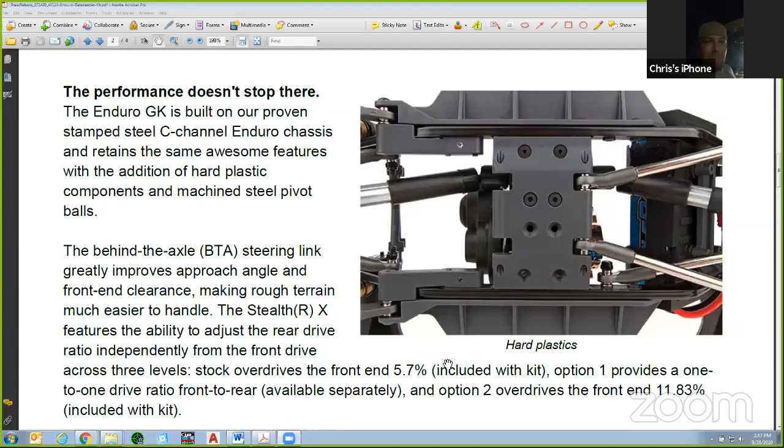This is very interesting because this platform can really evolve, and even their IFS series option that they have to upgrade, you could actually install this on here and make it work also. Having this small, to me it's a small rock crawler because it's on the smaller form factor, but it's theoretically going to be a little bit longer wheelbase than the Trail Walker or the other truck. It can really be anything wheelbase-wise, because you can make it whatever you want. So it's got a lot of potential on this, that's for sure.

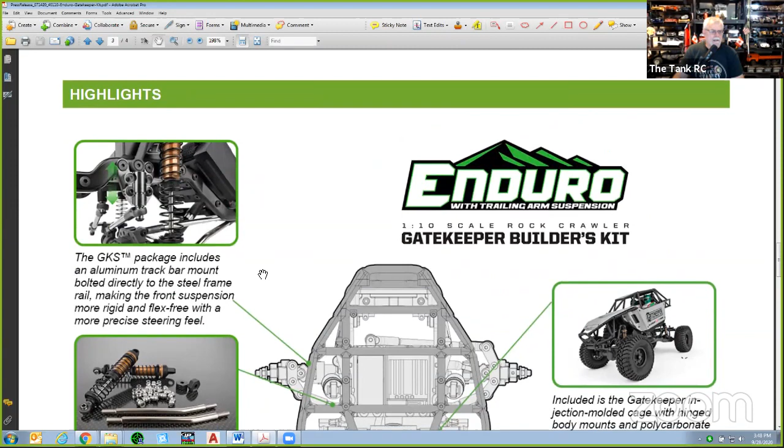They have this thing, and maybe we can talk to Chris about this, but this front piece here is for the GKS package, an aluminum track bar mount, for the front suspension, for the steering link. So that's very interesting, the way they've got it set up.

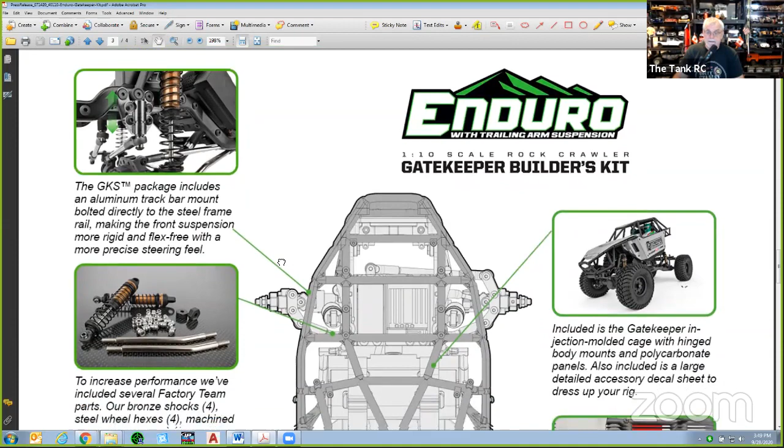It's kind of interesting how they've done it. The way the body opens up is really nice, it swings up all the way. If you watch HemiStorm's video, you'll actually see what he's doing. It's really neat, that shock position.

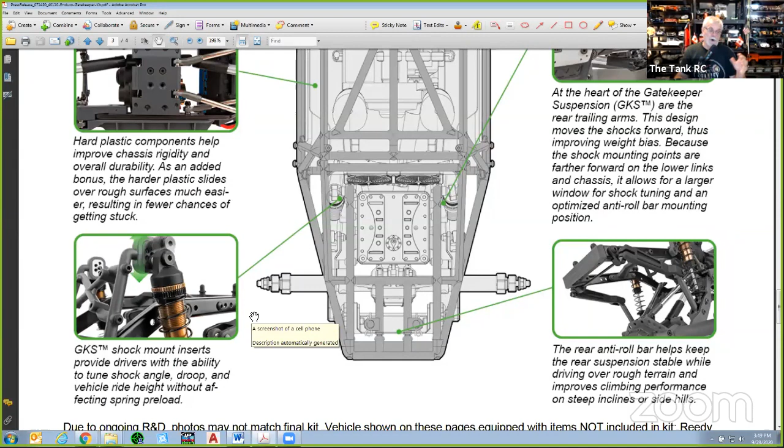They've actually announced some different parts they're having for hop ups, and these are the parts you're actually getting for this - the shock position that goes at the back. That's why they were showing new hop ups available, which are available for their other trucks, but now they're going to be releasing it for this truck here. So I actually got one on order, hopefully it'll get here soon.

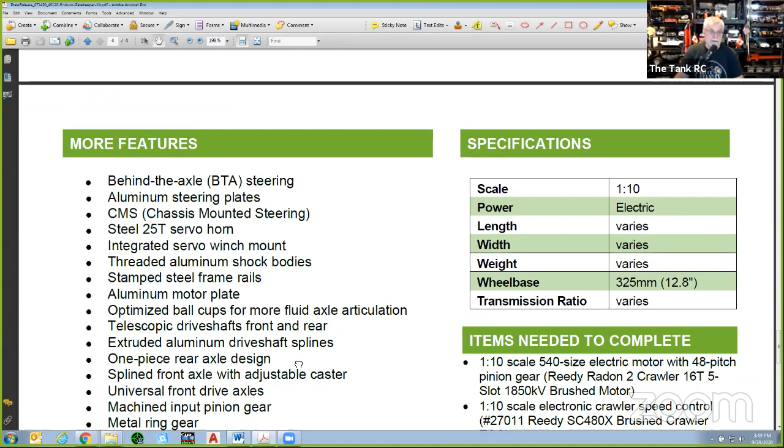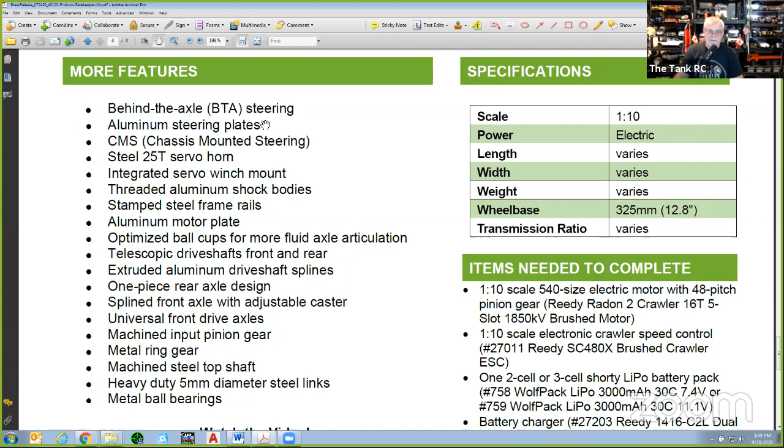So behind the axle steering - this is a great idea. Everybody puts it in the front, but they were the first to actually bring it to the back, which makes complete sense. This is a really good idea.

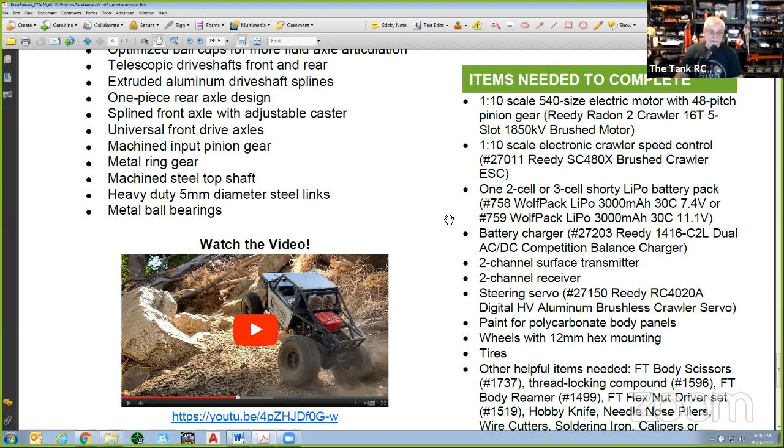So to complete it, you do need a motor, a servo, and all your electronics - basically your transmitter, your receiver, and things like that. It's really neat. In the US, they're saying their price is going to be about $299, which is fair for a kit.

So that's not bad, but check out their website - they've got a lot of different pictures on there that are really nice. And it makes a lot of sense going with this, especially since you get all the hop-ups, all their hardened plastic that comes with this truck, plus you get the body. HemiStorm was actually talking about getting a body from Proline that fits on top of it, so you can make it your own truck and customize it the way you want.

So it's very interesting - let's go to pictures. You have all the interior, a whole bunch of stuff, but looks like Chris is ready. There he is in his studio.

Sorry to bug you late at night like this. No worries, no worries. I just heard you say about the behind the axle steering - can you hear me okay? Yeah, I can hear you. Because I'm on my phone, so I'm not sure how this Zoom thing works. I actually just installed it, so this is my first Zoom talk.

But the first to actually come out with the behind the axle steering were HPI with the Venture. Okay, I didn't know the Venture had that. Yeah, they actually do. But nonetheless, they got a ton of innovative stuff in this Gatekeeper, especially seeing that it combines the trailing arm suspension but can also be set up with independent front. Well, I think that is absolutely really cool.

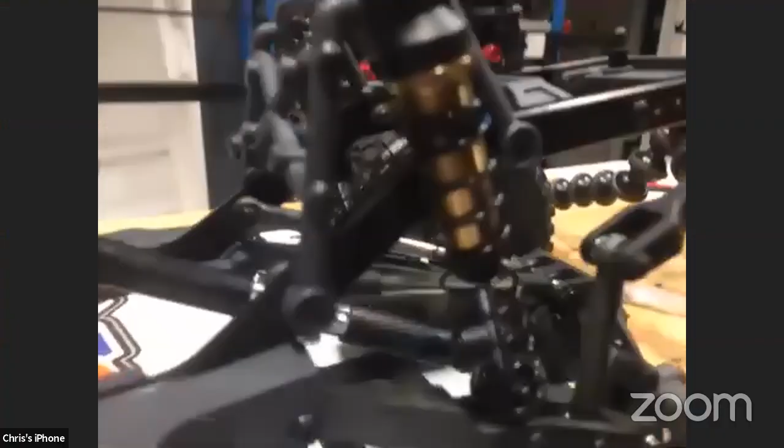So you need some excessively long wires to actually use it as such, especially if you put the receiver and the ESC in there, but there's plenty of room here to do something. Where did you put your receiver? My ESC is in the front where the motor usually goes, and my receiver is here on the floorboard, not sure if you can see. Then the ESC is here in the front. I also wish, and I don't address this in my video, that they'd kept some sort of protected channel behind the battery tray, so you could put your motor wires or servo wires in there, because right now it's a bit exposed if you run any type of electronics in the front. It's not a big deal, but...

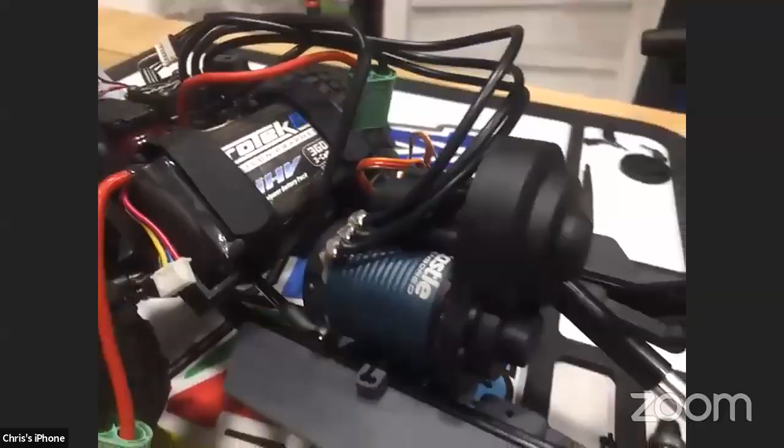Now, do you have a trail walker close by, just to put it beside to see the difference in wheelbase? Because theoretically they're going to be pretty close to the same. Yeah, I think it's half an inch difference. Half an inch, okay.

Look at that, we're getting a private tour of his collection too. Let's see if this works.

Yeah, it's quite significant. Yeah, it's not bad. It's nice how the tires stick out and how you can actually use that other body to go on it. It's a narrower body, which still looks good. But on that truck, it actually looks awesome. Of course, if you go nitpicking, it's a totally different scale body. Yeah, yeah, of course, yep.

That does look good, man. That interior in that trail walker looks good. Yeah, so I cut mine out as a T-top. T-top, you see? Yeah, you come out with the craziest and good ideas.

So this is actually, let me see if I got that right - this is a Proline Jeep Cherokee body. I cut it to fit this trail walker. The width was kind of okay, just trimmed it a little bit. Oh yeah, definitely, the width was actually perfect. I trimmed the back portion, the bed that the trail walker body had. Cut that out, cut the rear window out, looks great, and I bobbed it.

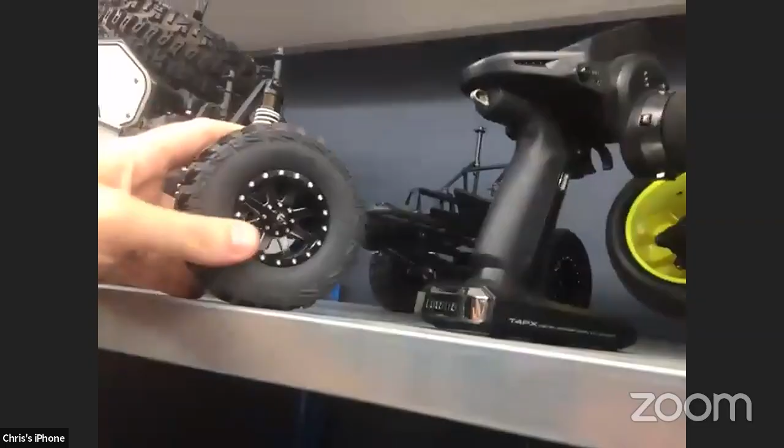Yeah, well, I got like my little crawler collection over here for the most part. Yeah, it's too bad about HPI. I certainly hope they do come back. They've come out with such great products, and it's kind of sad. Yeah, I'm fortunate enough to have one of their builder's kits, so that one I still need to do up.

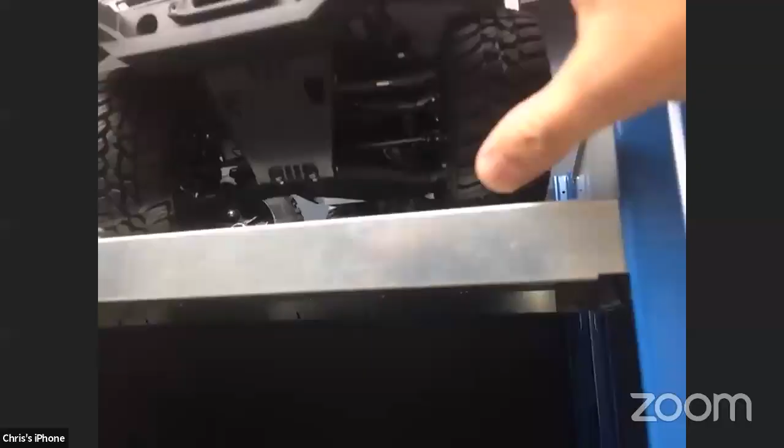There's another element, yeah, this is the one with the IFS installed. Now the only thing with the IFS, it does come down a lot - that's the only downfall of that IFS. Well, what they did is it comes down a bit, but then you got like a different shock hoop or shock, however you want to put that, to kind of compensate that. But for really scale people, if they want really like a Ford with IFS or a Chevy or whatever, if they really want it, they can have it. A couple guys did try it here, and it ran okay.

It's just you do have to get used to it. Yeah, well, you'll see that in the future on the channel. I got a Trail Runner 2, so I'm really happy with that one. Also going to do some custom paint on that one, but most likely, I'm not sure yet - it could be that the IFS from my Sendero will actually end up in the Gatekeeper. Not sure yet.

Cool, so the new Gatekeeper, what are your thoughts about it? Do you think it's like, I know you've already said it's got a lot of potential and things like that - out of 10, what do you think it is? Out of 10, I would say, well, I didn't know the sticker price yet, because mine was like sort of a pre-production, pre-release. But seeing that it's $300, I say out of 10, it's an 8.5, because it's basically fully upgraded, and whatever you do not need is not included.